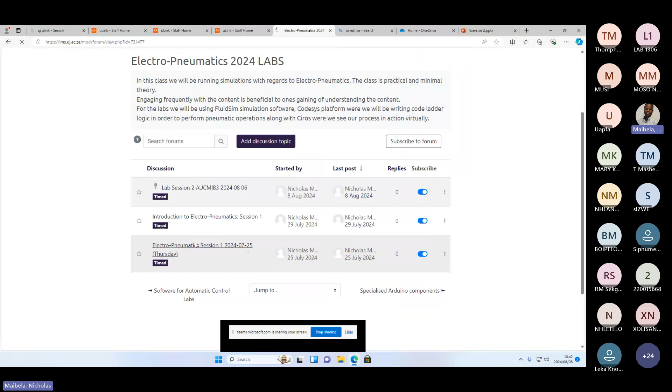So there is your Electro-Pneumatic session 1 that we did on the 25th of July, 2 weeks back. If you click into that you will see - let me go back, sorry about that - it's under Introduction to Electro-Pneumatic session 1. That is where you'll find the first session we did. So remind yourself that this is where you get your recordings.

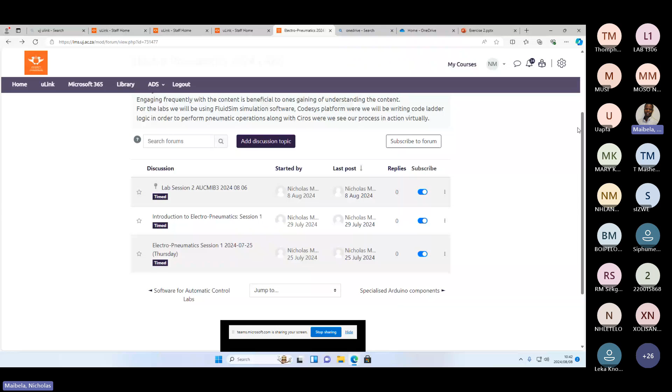So without much waste of time, I think we can begin with the session. So 2 weeks back, on the first session, we were covering that. So today we are now going to be doing exercise 2, which includes some of the things we did and new things that we'll be doing for today.

So yeah, I hope everyone has the software on, and let me just also open my software.

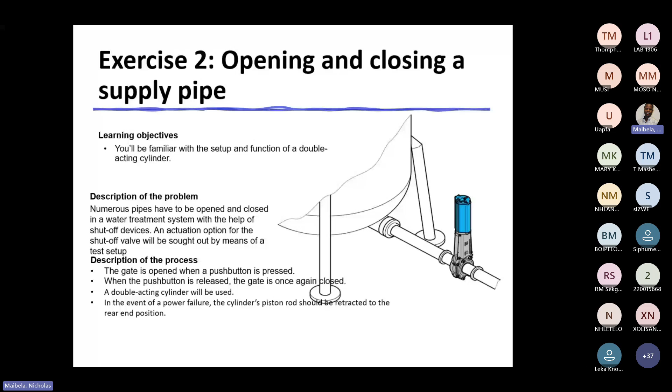So let us go to our software and start building.

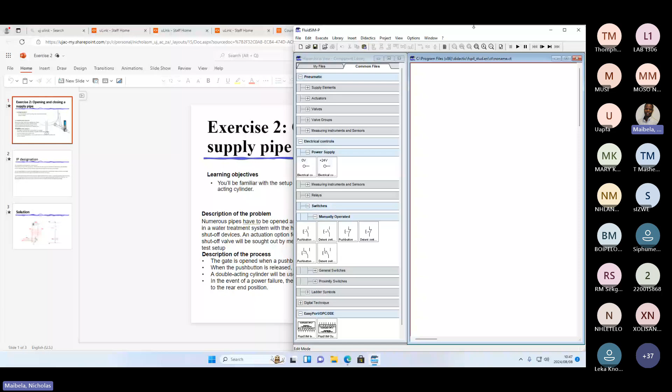Okay, so let us click on new at the top left corner, and then let us extend our drawing page like this, and then let us start putting in our supply elements. Remember, you always have to be using a compressor.

From the first session, we went into detail about the function of our compressor, and I even showed you guys the component photo. But for those that still want to see what a compressor looks like, you can just click on the component, and then click on component photo, and then you'll see how your compressor looks.

So I won't do this for every component because we did this in the first session. Just know that if you want to see how your component photo looks, you just click on the component, then right click, and then select component photo.

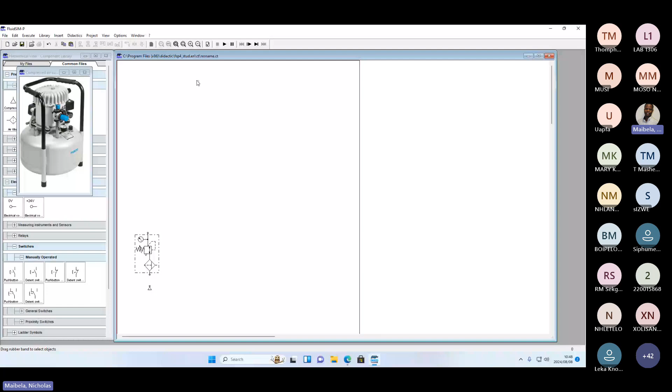So we will be connecting our cylinder to our air service unit. Since it's a double acting cylinder, the kind of valve you're supposed to be using is a 5/2-way valve. So we'll have to go to our valves. Let us first put on our double acting cylinder, and then let us go to our valves.

It's under valves. You'll go to frequently used way valves, and then we'll go for solenoid operated. Because it's electro-pneumatics, we'll always be using solenoid operated valves. So let us put a normally closed 5/2-way solenoid valve. It's the fourth component in your list under your components there.

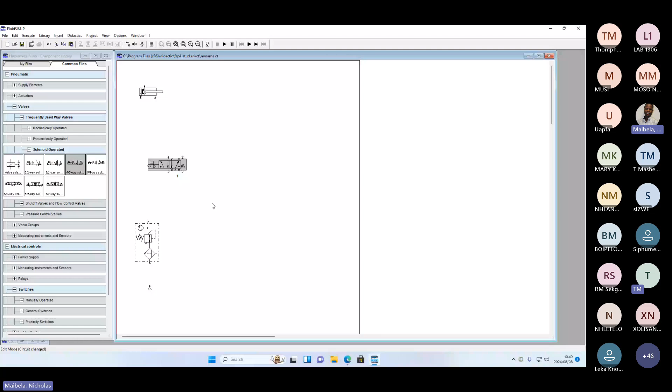Okay, so we'll put that on, and then we'll now connect our pneumatic circuit as such, and then we're done with our pneumatics section.

Now we have to draw the electric circuit that will be controlling our pneumatic components. How you do that is by first putting on your power supply, as I'm doing now. Let us just rotate this one anti-clockwise by 180 so that we can establish a connection, and then we put on a 24-volt line supply, power supply.

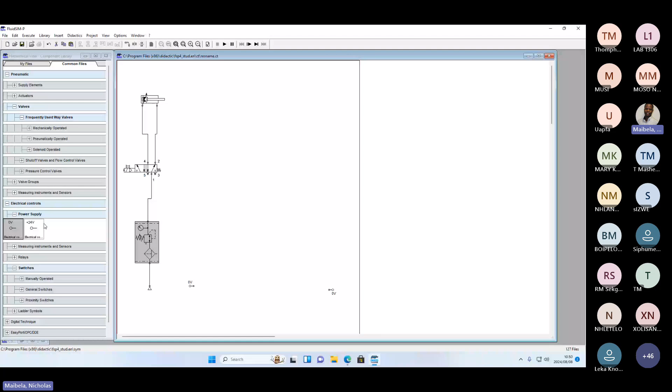And then we also rotate that by 180, right? And then let us just connect 24 to 24 and make it straighter there. And then connect 0 to 0 and then make it straighter there, right?

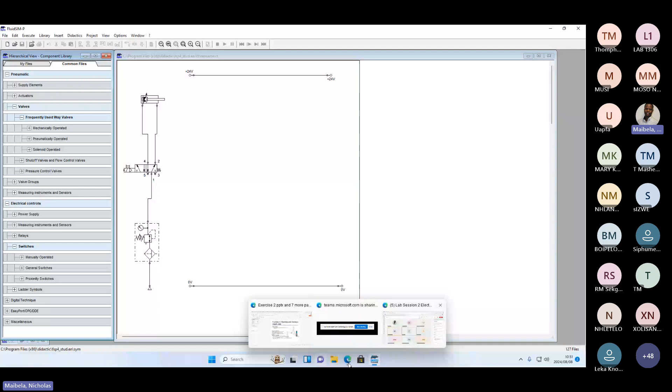Going back to our exercise, let us go back so that we keep track if we are answering the question or not, right? So they're saying the gate is opened when a push button is pressed. When the push button is released, the gate is once again closed.

A double acting cylinder will be used, which we have already put onto our workspace. In the event of a power failure, the cylinder's piston rod should be retracted to the rear end position. For this case, we are using direct actuation.

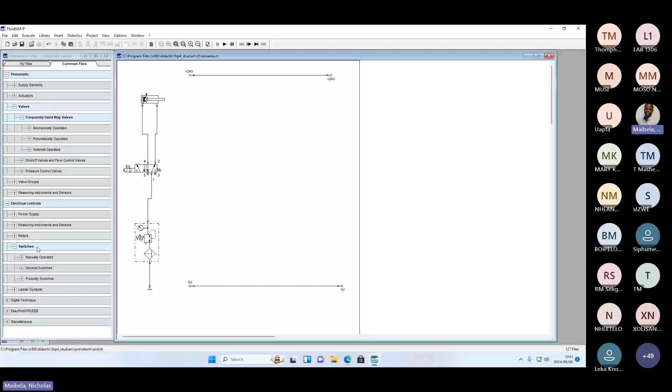So how you draw your electric circuit is that we'll now introduce a push button, right? So you'll go to switches on your component library, then manually operated, and then push button make.

Am I too fast? Yo, guys, I thought I'm speaking slow motion now. Okay, so where did you lose me, guys? Where did I lose you actually?

The electrical side, the electric circuit. Let me see. Okay, that other guy is still connecting the pneumatic circuit. How many are still on the pneumatic circuit? You're still connecting.

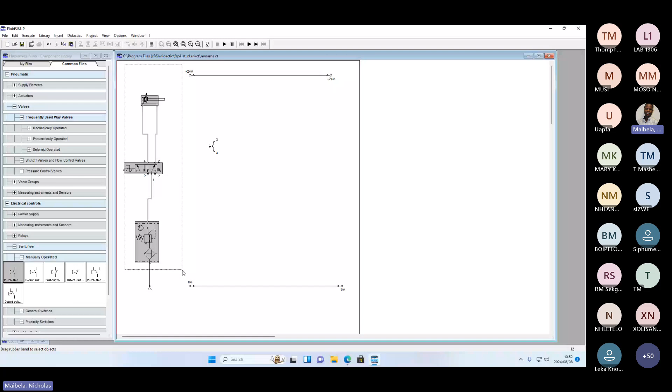Okay, guys, I'm gonna give you 2 minutes to connect your pneumatic circuit, and then we'll go ahead and connect the electric circuit. So just a recap on our pneumatic circuit: we put on a compressor, an air service unit, and because this exercise wants us using a double acting cylinder.

We will be using a 5-way valve. Now if you might recall, how do we see that this is a double acting cylinder? First of all, it doesn't have a spring return, and it has two ports, so two inlet ports.

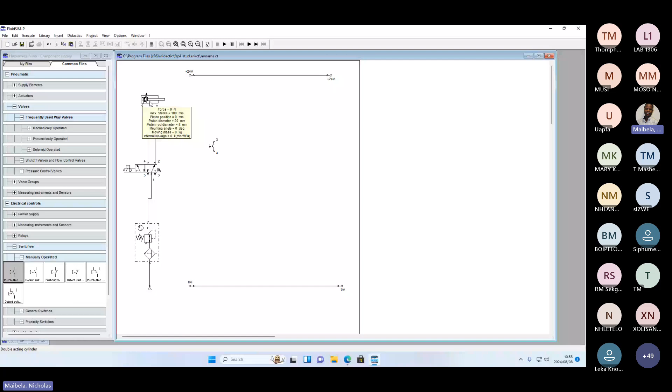So this one that I'm hovering over is where your air will be going into to extend the cylinder, and then this one is the port whereby the air is recycled so that it can retract your cylinder to the rear end position.

The guys at 1306, have you connected? Sir, can I ask something? Okay, sure, go ahead. Like when it comes to the test, we're gonna be given like this.

I'm asking, say if when it comes to the test, we're gonna be given something like this, the description of the problem and also the description of the process, then you have to know how to connect all those things. Yes, definitely, and you'll also be given the components that you need to build your circuit. You won't be given all, but most of them. But some you'll have to figure out on your own how to successfully answer the question.

Okay, so the guys in here, let's say okay, let's say we're given the statement and we also all know the components, but the problem when it comes out is you don't know how to connect them, so you lose marks when it comes to that. Absolutely, you're losing marks if you can't connect. You're losing marks. Okay, okay, thank you sir. Oh, you're welcome, you're welcome.

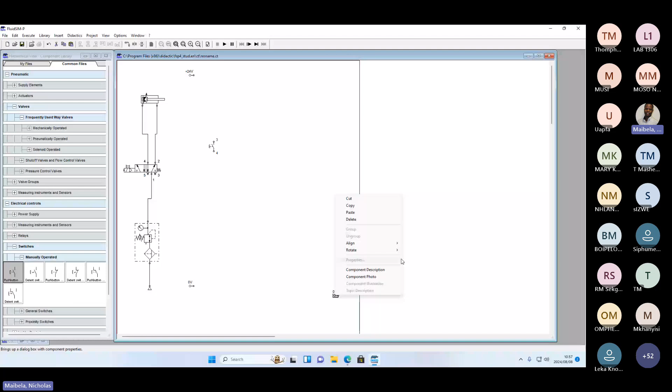And then there's your 0 volt. And then you just need to rotate it 180 degrees so that you can be able to establish a connection. So connect this one to this one, 0 to 0. And then we can also copy this, copy and paste. So yeah, we're gonna connect our 24 to 24 as such.

Okay, so we have our power supply on, right? So to allow air to go to the cylinder, we have to have a push button, and we have to have a solenoid valve. So the purpose, let me put on a solenoid valve.

Okay, so for starters, what I have put here is your push button, the first component under the manually operated switches. So you have your push button, and guys, let us agree on one thing: I would like for us to name our components. This enables readability.

It makes it easy for you to follow your work. So let's get in the habit of naming our components. Not all of them, but the ones that I'm naming, get in the habit of naming them too. For this case, our push button we'll label as PB, so that just means push button, and then you can click OK. And then there you have your PB.

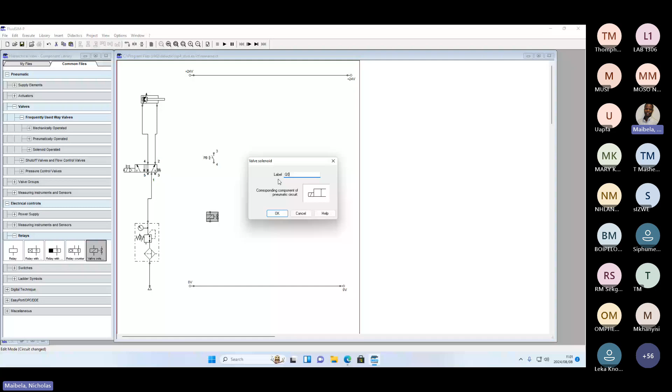You can name it VS for valve solenoid. You're not really limited, but I think it's good if we stick to naming our outputs as Q0, Q1, Q2, etc. So we'll click OK.

Then you'll go to your 5-2-way valve, and at the beginning of your component you will hover over that small circle there, and then you'll double click. And then you'll also label it Q0, and then you would have established connection between your valve solenoid and your 5-2-way valve.

So let us get to the connection. Yes, where did I lose people? Did I lose people?

Okay, so we are basically now establishing a connection. So let's connect our 3 to the 24 power supply, and then connect your 4 to this end of your valve solenoid, and then connect this end of your solenoid to your 0 volts. So let me just make it a bit neater.

So like that, we have established our electric circuit, and this is what you call direct actuation. It's important that you know this. So for this semester, we'll be going through direct actuation and indirect actuation, so it's important that you know how to differentiate between the two.

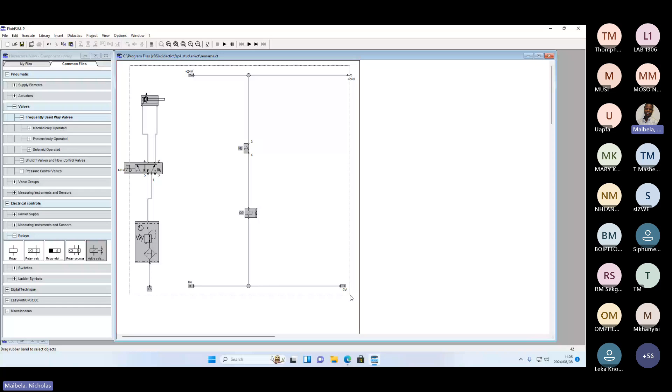So any questions? Otherwise, in the absence of questions, I'll be moving on to the next exercise. Bear in mind that because we've lost some time, we'll be moving relatively faster, but we will accommodate everyone.

Sure. Huh? Oh, okay. A student is asking about the... okay.

When I press the push button, you see a red color, right? That red color just means that is the electrical signal going through to be able to actuate your system. So it's the electricity basically passing through.

Yours is different. Let me just check. Okay, okay, okay, okay. So yeah, all right.

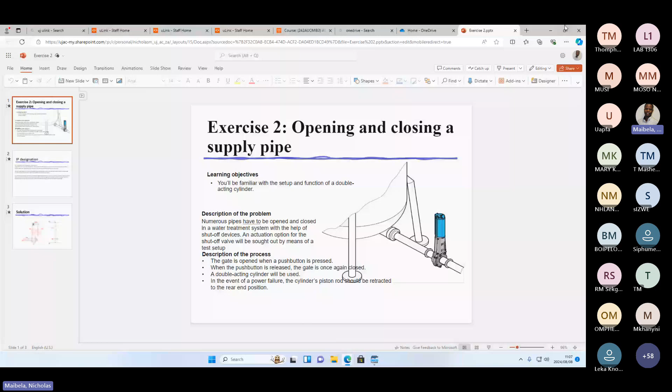So guys, moving on, let us go to exercise 3. Let me close this, then go to exercise 3. Okay, so for this exercise, it's sealing of cans. So on the right we have an animation of the process — just appreciate that, and let us read the learning objectives.

For this objective, you'll be familiar with the setup and function of a relay. You'll be able to make use of indirect electrical actuation. Keep that in mind — now it's indirect electrical actuation. So the description of the problem goes as follows.

Half liter cans are filled with wall or ceiling paint at a manual workstation. The lids are press fitted with a pneumatic press. So at the top of your press, you have your pneumatic system, and the cylinder is responsible for the pressing of your lid.

Description of the process: the cans are manually inserted into the press. So your operator comes and inserts the can into the system, preparing it to be closed. So after pressing a push button, the press cylinder is advanced — that is, it goes to the front end position.

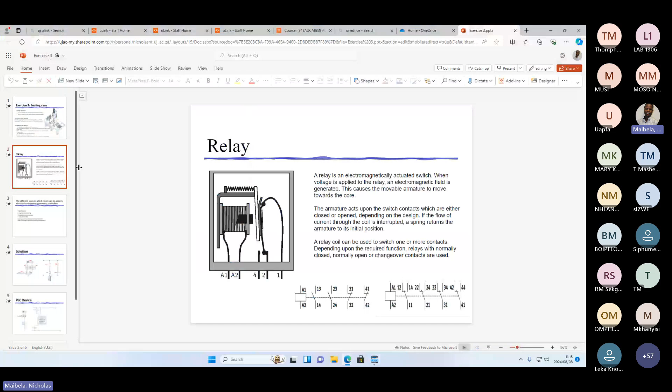Let me just go back again to the problem. We are also still going to be using your double acting cylinder, so do not delete that component as well. Control of the cylinder will be executed indirectly by means of a push button.

Okay, let me just go out of simulation. Sorry, sir, to disturb you. Sorry sir. No problem, no problem.

We're coming to this, okay, this one. I'm looking at the description of the process. We are given all the steps, but we are not sure, like coming to the test, how we're going to connect them. Can you please go step by step and tell when I connect this, it's because of this and this, and the statement says this and this, so that we can get more clarification.

Let me put it this way. That way would be me leading you directly to the answer, and then the purpose of a test would be meaningless. What I will do is put a description of the component list that you need in order to connect your circuit. I cannot give you a statement that tells you all the steps you need to connect your circuit, because that would be me giving you the answer, and that is not a test. A test should test your understanding and so on. So I don't know if I've answered you.

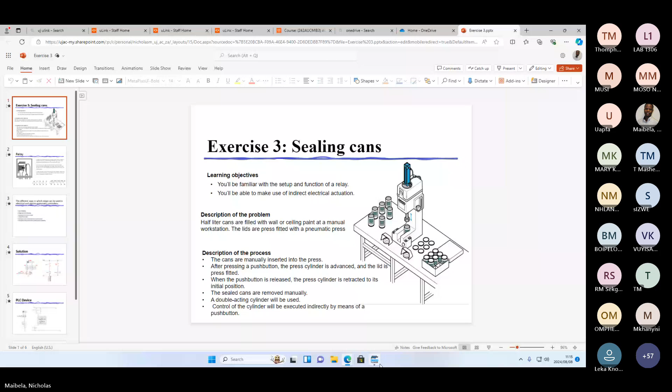Oh sorry, okay sir, fine sir, sure, sorry sir, yes. Can you please go back to the FluidSIM, the exercise 2? Exercise 2, yes, okay sure. Can you please run the simulation? Let me run the simulation.

So if I press the push button, your cylinder will extend, and then it'll only go back until you release your finger from the push button. Or what might be the problem?

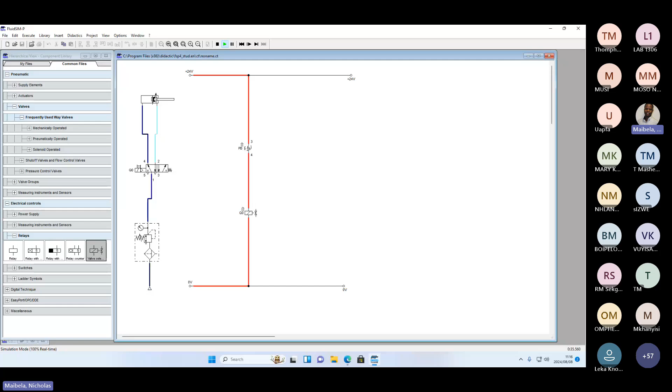You see, when you're running the simulation in the circuit, it indicates the red line from 24 volts to zero, facing in the opposite direction. See, when I'm running mine, it's not showing like this. Mine is in the opposite direction. There is no problem.

Let me show you in this way. You can even do this. Even if I would delete this side, and delete this side, and then let me just delete this node, it'll just run all the same, right? If I press, it'll extend, and then it'll go back. I can say that you do not necessarily need to have those two 24 volts and those 0 volts.

But we just make it so that we can have more space to work, right? Because as you continue, you'll get to see that we need two 24 volts and two 0 volts so that we can accommodate more components. You understand?

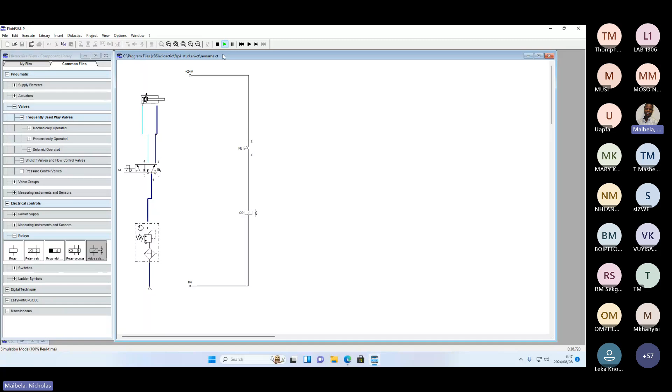Let me just undo. So let me just put my power supply back on, right? Rotate 180. So also for this exercise 3, you don't have to delete your power supply. You don't have to start over, otherwise it will be a waste of time, right?

So now I'm just connecting back how my switch was. I'm gonna delete this line between the push button and the solenoid, and then also delete this line between the solenoid and the 0 volt power supply line. And then I'm just gonna put our solenoid there, so we do not have to reconfigure our pneumatic component. It's fine like that. But now what's different is that we will actuate our cylinder indirectly.

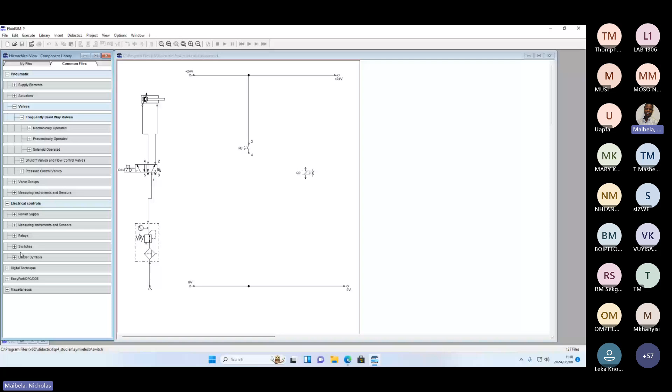So how that happens is that now your push button is linked to your relay. We spoke about our relay, right, our friend the relay. So go to the relays group, and it's the first component under the relays, under your electrical components. Then you put it onto your workspace. Just a small tip so that you don't mess up your library: it's good to always close your library once you get the component that you need.

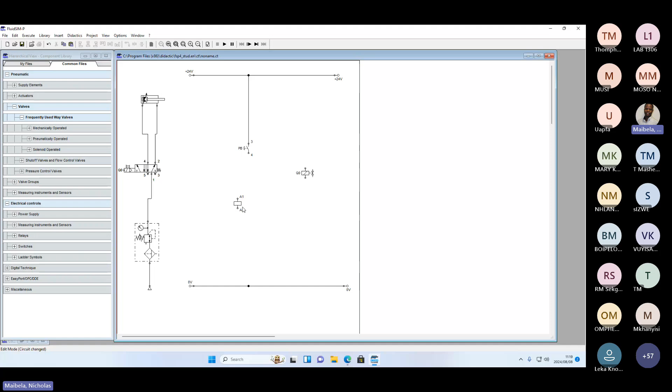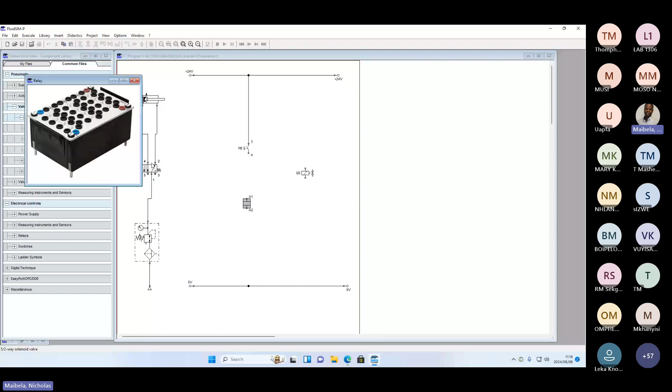Like that. So we'll connect our push button to our relay. That is how our relay looks like. Let me see if we can get a component photo. So yeah, that is the photo of our relay board. That's a relay board there. But yeah, you can say a relay as well. We have that component in the lab, and you are welcome to come interact with it.

So we'll connect our push button to our relay as such: your 4 to A1, and your A2 to that node there. And then we'll name our relay R1 as such, and then we'll click OK.

Remember, you always need your valve solenoid to communicate with your 5-2-way valve. So you will need to connect that valve solenoid to your changeover, since your relay has a changeover component. But on the simulation platform, to show that changeover, you go to switches, then general switches, and under general switches you'll see the last component there: the changeover switch.

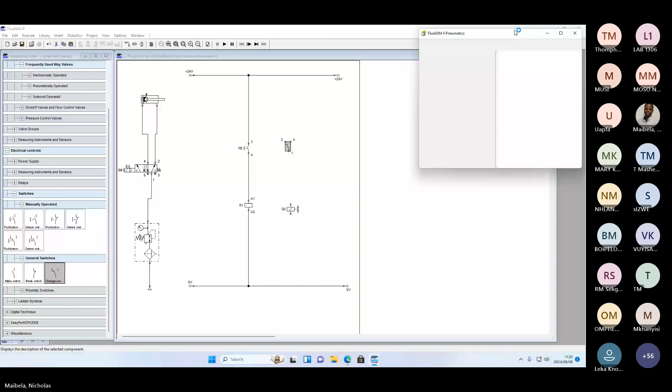We can also get the description. Sorry about that, let me put it. So general changeover switch is tailored according to the component that actuates it. For example, if the changeover switch is linked via a label to a switch-on delay relay, the changeover switch changes to a switch-on delayed changeover switch in the circuit diagram. So just know that when you are performing indirect actuation, your valve solenoid will be connected to your changeover.

And then let us also establish a connection between that. Your 4 will be connected to your 24 volts, and will not connect up to anything else. And then our Q0 will be connected to the 0 volt power supply line, like that. And then you would have established indirect actuation.

If you can recall, in our previous exercise, it was your push button connected directly to your solenoid, and then it was able to perform the function that was requested. But in this regard, because it's indirect actuation, instead of connecting your push button directly to the valve solenoid, you connect your push button to your relay, and then via your changeover to your output, your valve solenoid Q0.

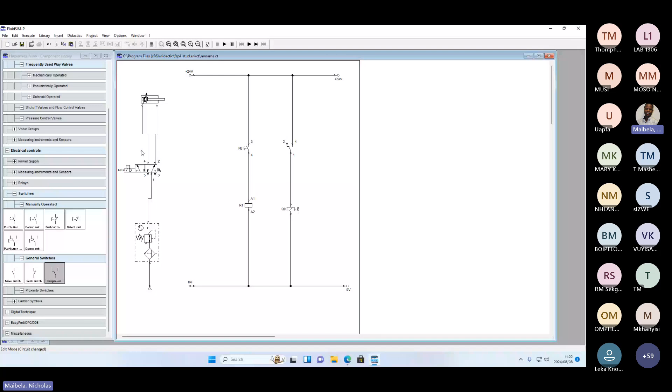When you press the push button, your cylinder should extend, and once you release your finger from the push button, your cylinder should go back to its initial position. To make it more realistic, I'm going to rotate our cylinder so it can be in a downward looking direction, just like the problem, rotating it 270 degrees and connecting it like that.

I hope that is not confusing. I just want us to make it as realistic as possible when running our simulation. So we're done with our connections, and now we're going to run our simulation. You click play, and then click the push button.

As you can see, our simulation is not running. What is the problem? The problem is that, as I said, within your relay you have a changeover, and in the simulation software you have a component that is a changeover, but we didn't establish a communication between our relay and our changeover.

So how you do that is by double clicking on your changeover. I want you to note that under label there it says corresponding component of electrical circuit. There you have your relay, and then you have this other component here, which we will not discuss. So you have your relay.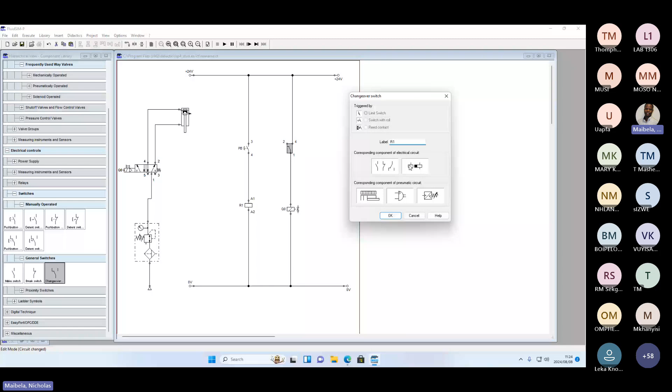What that means is that your changeover communicates with your relay. So since we named our relay R1, our changeover should also be named R1. Then we click OK, and now if we run our simulation, it will run accordingly.

Once we press our push button, our cylinder will extend, closing our lid. Once the lid is closed, the operator will release their finger from the switch, and then the cylinder will go back to its initial position. So let us run that and press our push button.

As you can see, our cylinder is going downward, meaning it's pressing the lid and the can, closing the whole product, closing the lid. If you release your finger from there, you'll see your cylinder going back. You have successfully connected your circuits and answered the question.

So, any questions? Otherwise I'll be... oh, someone in the chat says it's not working. Is your simulation working? Awesome, awesome, awesome. Let me just answer the guys at 1306. Let me just view this. Oh yes, I think I answered that question.

For the person that posted that picture, the reason why your model is not running, your simulation is not running, is because you did not create a communication between your relay and your changeover. I can see that you assigned a label to your relay as R1. You need to do the same for your changeover and call it R1 as well, and then your simulation will run. Oh, they managed to fix it.

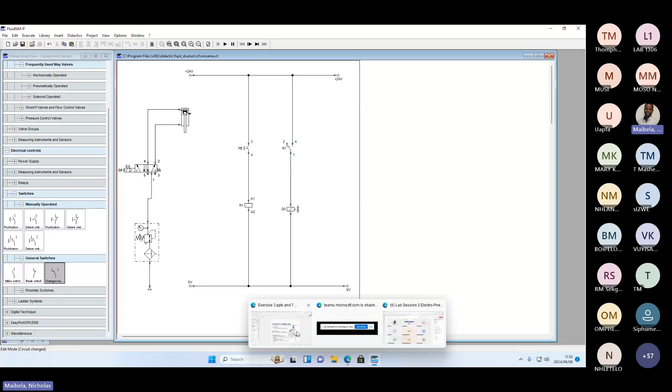So we can now move on to exercise 4. Okay, going to exercise 4, let me open up exercise 4. I'm gonna just close this one and go to exercise 4. Exercise 4.

Okay, so exercise 4 goes as follows: filling plastic pellets. The learning objectives are that you'll be able to set up indirect actuation, and then you'll be familiar with logic operations. That is another important section. So you'll be able to select solenoid valves based on the specified requirements.

So the description of the problem goes as follows: plastic pellets need to be filled from a storage silo. If you can see my cursor, that container there, that animation looking like a container, that is your silo. And within it, it has the plastic pellets. So the plastic pellets need to be filled from a storage silo, and the silo is opened and closed with a flap. The process will be started from 2 locations.

Okay, so I'm glad they mentioned 2 locations. Now remember, we are using indirect actuation, and indirect actuation involves using a relay. So when they say 2 locations, they mean that there's a person in the control room upstairs, or at a distance, and then you have your silo. So that's what they really mean by 2 locations. So your relay helps you to work remotely, to work from a long distance.

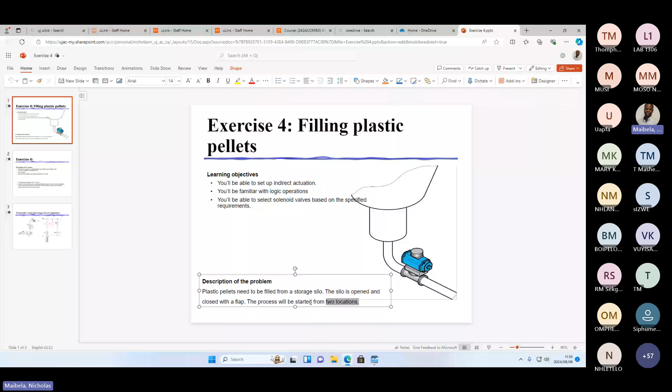So yeah, that's what they mean by the process being started from 2 locations. Okay, going to the next slide, it's a continuation. So the flap is opened by pressing either one of 2 push buttons, and the bulk material is emptied out of the container. When the push button is released, the flap is closed, to discontinue any flow of your plastic pellets.

So a single acting cylinder will be used. Control of the cylinder will be executed indirectly, by means of a push button. In the event of an electrical power failure, the cylinder's piston rod should be advanced to the forward end position. Great, so for this case, that last statement is very important. What that statement means, I wish I could do a mini drawing of what that means, but okay, I'll just try to explain it.

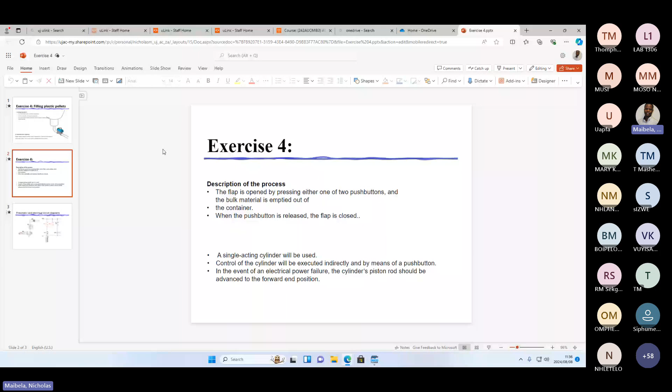Okay, let me create a slide and draw something to explain what's really happening in this section.

Hey, why is it in a language that I don't understand now?

Anyway, it's not a train smash. Let me just say, I hope it types in English.

Okay, drawing. Sketch of a drawing. Let me give an explanation so you can imagine it before I draw out how this problem is going to play out.

They're saying that you have pellets going through your pipe. But envision your cylinder in a downward position and already extended. So how will the pellets go through if it retracts?

This is kind of opposite to what we were doing previously. Initially, when you press play, your cylinder should already be extended, meaning we'll now be using a normally opened valve. Let me quickly draw it.

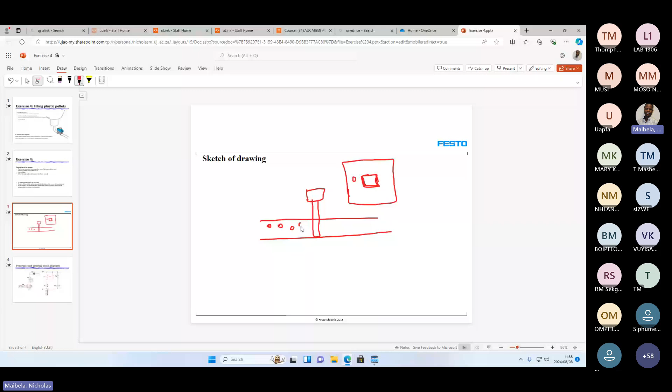From the silo, right—the silo is something like that, it has all these pellets and they're going through this pipe. Now because our cylinder is already extended, the pellets can't pass through. So how will they pass through?

It's when the cylinder is retracted. Initially it's advanced. So previously, in the previous exercises, the cylinder was in its retracted position, but in this case it's in its extended position via a normally opened valve. So once we press our push button, I'm going to draw dotted lines now.

What should happen is that now the cylinder should be at this position, meaning allowing the pellets to flow. So with that description, you'll be able to understand the whole process.

So going to our FluidSIM, we'll delete some components, not all of them. Your compressor and your air service unit will remain on your workspace, but we're going to delete our 5-2-way, and then delete our cylinder.

So for now we are building our pneumatic circuit. Let me close these for now. You'll go to your actuators and select a single acting cylinder, as such. And for our case, we'll be using a normally opened 3-2-way valve.

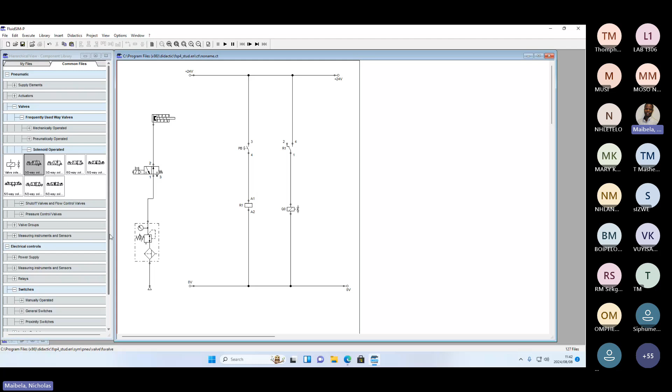But I want to introduce something. As you've been observing, when we press play, our cylinder opens quickly and closes quickly. So for this case, we want our cylinder opening slowly. How do you do that?

You do it by going under shut-off valves and flow control valves, where you'll see a one-way flow control valve, the first component under that category. Once you press the push button, we want our flap or gate opening in a slow motion, not quickly, just for control sake, so that we can regulate the speed at which it opens up.

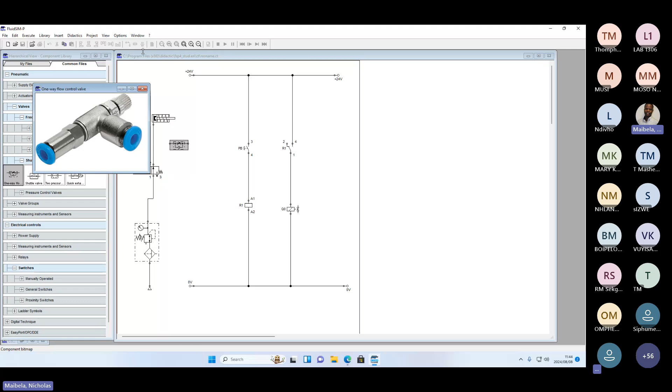So a one-way flow, let me just see if we can get a component photo. This is how your one-way flow control valve works. Its general purpose is to control the rate at which the air is coming from your compressor.

Component description: the one-way flow control valve is made up of a throttle valve and a check valve. The check valve stops the flow from passing in a certain direction, and the flow then passes through the throttle valve. The cross-section of the throttle is adjustable via a regulating screw. In the opposite direction, the flow can pass through the check valve.

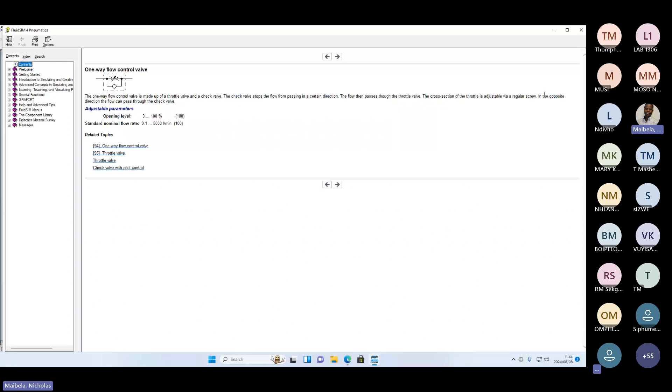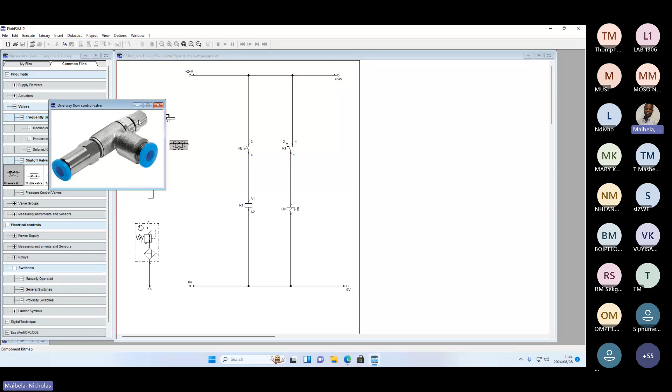So your one-way flow, if I can show the picture again, if you can see at the top it has a knob. That knob, you can calibrate it to whatever measurement you want, so that you can get the rate of flow that you want for your process.

I'm just going to disconnect this line here and put in our one-way flow control valve. I'm just going to rotate it 90 degrees. Then connect it to your cylinder, and then connect it to your two-way normally open valve.

If you can double click into your one-way flow control valve, you'll see this window. This window is telling us that at the moment our flow will be at 100%, but we want to reduce that flow for when the cylinder is opening, meaning when it's going back to its retracted position.

So how you do that is you can just drag on that blue toggle, and let's just take it to 10. Or if you don't want to do that, you can go to that box at the top and just write a 10. That is more accurate. Then click OK.

Is everybody okay? Okay, where did I lose you? I'll start with which explanation? Which explanation should I start with? Huh?

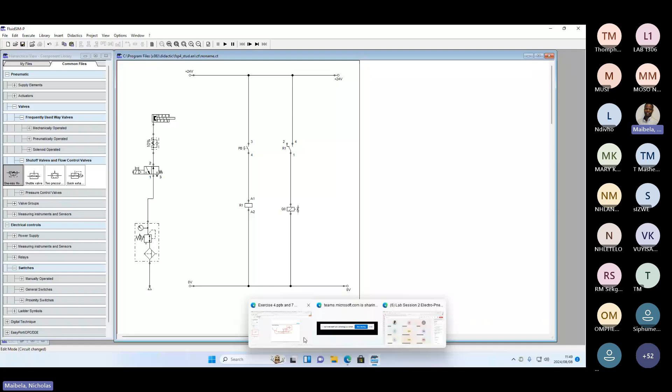So we have 2 types of logic operations: the OR logic or OR gate, and the AND gate. What the OR logic means is that, say you have 2 push buttons, one can control the system, or the other can control the system, or you can have both of them controlling the system. But with an AND gate, you have to have both components controlling the system - one cannot work without the other being on. I think with that explanation you can get the gist.

So for this case, they're saying that once we press the push button, our cylinder should go back to its retracted position. And once you click the other push button, the cylinder should go to the extended position, which is the initial position in this context. So for our case, we're going to use an OR gate. I'll be more clear in a test on when to use an OR function or an AND function.

So let us go back to our model. As the problem mentioned, this is indirect actuation, so we keep our relay there, our valve solenoid there, our changeover there, and our push button. But they're saying for this case we're using 2 push buttons, so we have to put 2 push buttons in parallel. You can think of an OR function or OR gate as a parallel circuit.

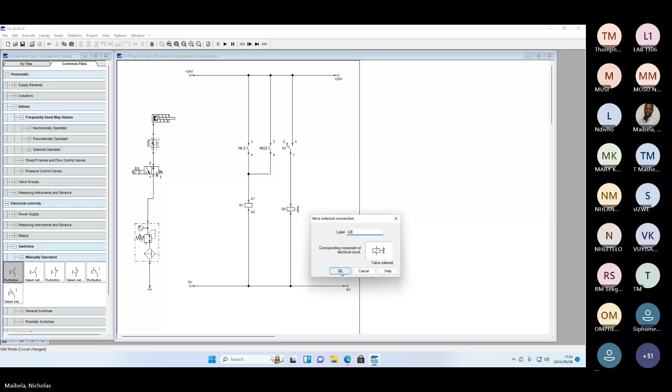Let us see what we did wrong. Oh, okay, I see where we did wrong. We didn't define our two-way valve solenoid, right? So we do the same as we did with the 5 two-way solenoid. At the beginning of your 3 two-way valve, you'll see a circle, and it'll be green. You double click onto it, and then label it according to how you labeled your solenoid valve. So you name it Q0, and then click OK. Okay, and then now our simulation should run successfully.

If you click play, it'll automatically extend, and then should you press a push button, it'll go back, right? And if you release, it'll go forward. If you push this push button, it'll go back, and it'll also do the same function, right? And then by that, you would have answered your question, right?

So yeah, I hope everyone is fine. Is everybody fine? Is everybody fine? Oh, someone is saying capiche. No, we're not done, we're not done. We are about to do the last exercise for the day, right? So yeah, I'm just gonna go straight to the next exercise. Do not delete all your components for now.

Before that, I just wanted us to appreciate that one-way control valve that we put in, right? Let's push the push button again and see something. If you can see, the speed at which the cylinder is going back and the speed at which it's opening, it's not the same. When it's going forward, it's fast. But when you press the push button, it's going back at a slow rate, right?

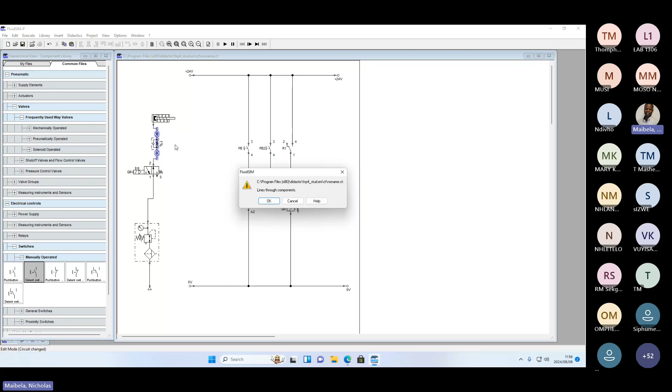Let me just see. Okay, so let me just reconnect again. So now we put the one-way flow control valve at 10%, right? So let us click play. As you can see, going forward, it's very fast. But if it's gonna come back via its spring return, okay, it's not performing its function. Let me see something.

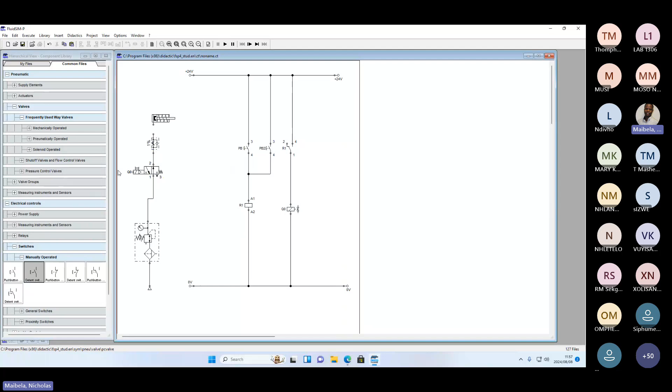Okay, I think we were okay the way we did it. Let me just delete this, and delete this. Okay, let me just connect again. Okay.

Okay, so I think for this application, since it's not a double acting cylinder, you're not gonna be able to appreciate the one-way flow control valve properly. So we will see it in action properly when using a double acting cylinder, right? Because okay, it is performing a function, but the opposite of what we want. So when it's closing, it's closing at a slow rate, right?

Let me just restart it. When it's closing, it's very slow. But we wanted it so that when we are pressing our push button, it goes back in a slow motion, right? So yeah, I'm aware now that you'll see this better when using a double acting cylinder, right? But otherwise we answered our question correctly, right?

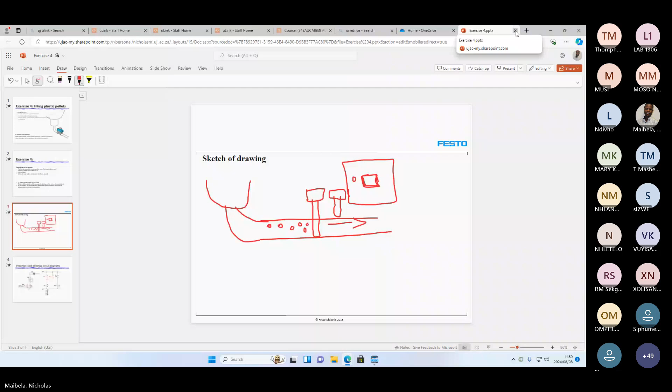So I'm just gonna stop that, and then delete our one-way flow control valve, right? So lastly, let me just close this. So exercise 5. This is the last one, guys, and then we'll be done for the day, right? So exercise 5, diverting packages, right?

You'll be familiar with the setup and function of a double acting cylinder, and you'll be familiar with the setup and function of a double solenoid valve. So that is also key. For this case, we're using a double solenoid valve, right? So description of the problem: packages will be diverted from one conveyor to another by means of a diverter, right? Further, the diverting gate is advanced when one of the push buttons is activated and the package is transferred.

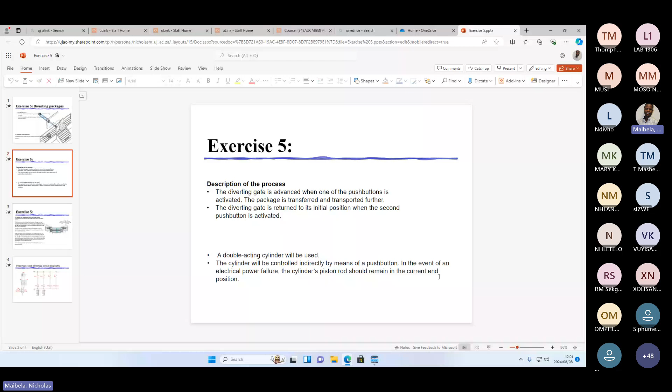The package is transferred and transported further. The diverting gate is returned to its initial position when the second push button is activated, so we'll be having 2 push buttons. But for this case, you're not told of any logic operations, no AND or OR operation. So a double acting cylinder will be used, controlled indirectly by means of a push button. In the event of an electrical power failure, the cylinder's piston rod should remain in the current end position. Bear in mind, for your test I'll never test you on direct actuation, it will always be indirect actuation. Make sure you're familiar with that, you know it, and you master it.

Going to our simulation, we'll delete a few components. For this application, we do not need a single acting cylinder or a 3-2-way valve, but we'll need an air service unit and a compressor. So let us put on our double acting cylinder.

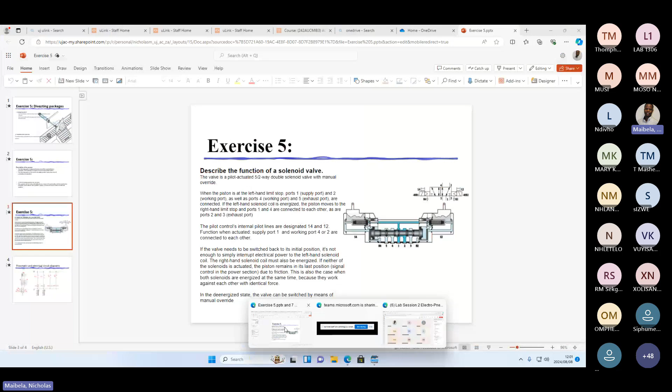And then let us put on a 5-2-way valve. It's called a double solenoid valve, so we'll be using a 5-2-way double solenoid valve. Under your frequently used way valves, go to solenoid operated, and it's the 5th option there: the 5-2-way solenoid impulse valve, and it's a normally closed one. Put it onto your workspace.

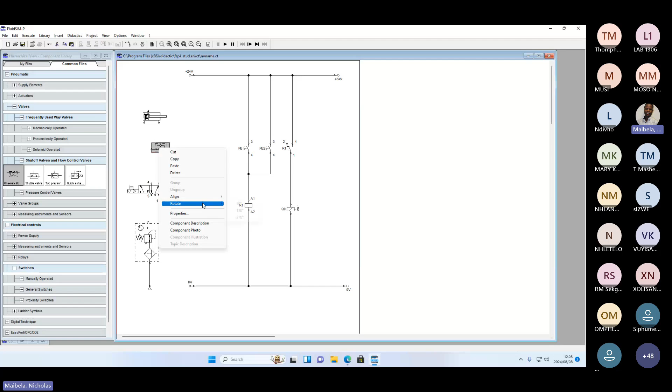Because we can appreciate the one-way flow control valve better on a double acting cylinder, we'll introduce that valve so you can see the change in speeds, the forward speed and the backward speed. We'll put one for when the cylinder is going back. Just rotate that - actually it's not 180, it should have been 90. So corrected that by rotating it to 90. It should be in this position, and then we can connect our 4 to the inlet port, connect our 2 there, and connect the other end of the one-way flow control valve to that end of the cylinder.

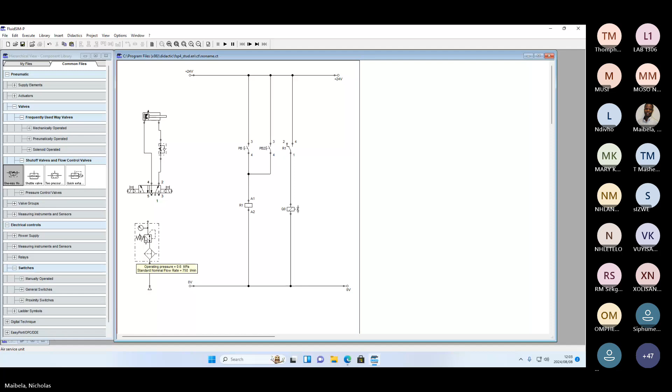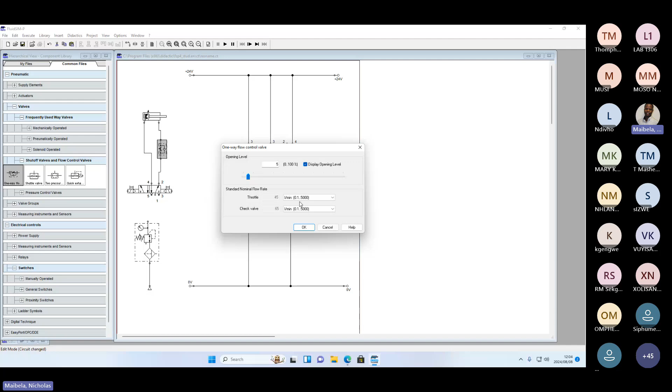If we can set the opening level to 5 and click OK, then let us also display it, 5 there, sharp.

The student Ashanti asked, how did we know which is the double solenoid valve? You know that by having two of these. If you look at your component, it has two - like circles at the beginning and at the end, and also those horizontal lines at the top. Observe my cursor. Let me put on one that is not double solenoid - this one is a single solenoid. How? This portion at the beginning is not duplicated on the other side. But this one is the same on this side, and the same on this side - that's the best way I can explain it. So that's how you see it's a double solenoid valve. This means you'll be using two solenoid valves to communicate with your 5-2-way valve, but as we move along, you'll get to see why it's called a double solenoid valve.

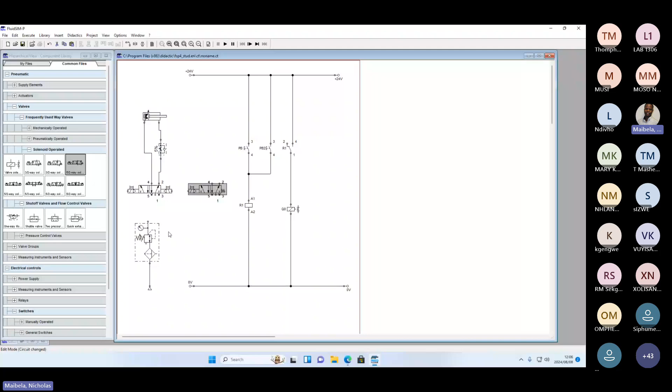So let me just quickly connect that. Okay, okay, no problem, sharp.

Guys, are you having a session after this? You're having a lab, at what time? 12:30 - hey, this guy, huh, 12:15. Okay, I guess we'll pick it up.